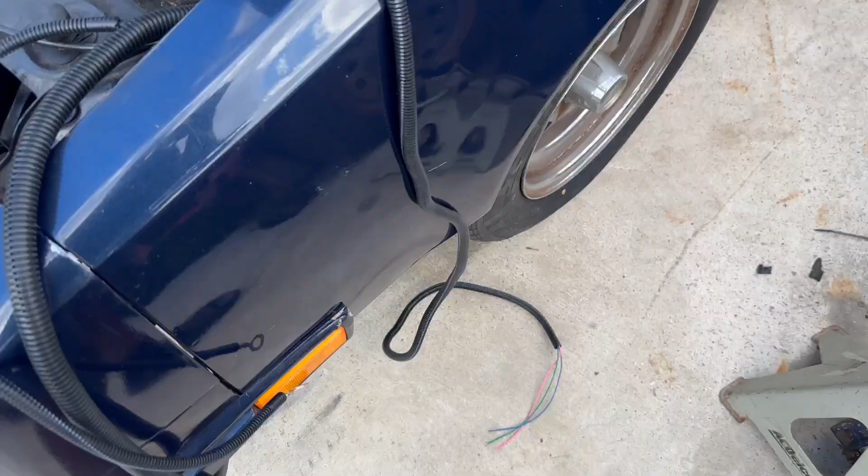So far I mounted my fuse block. I'm gonna show y'all where I mounted it at. Like I said, I mounted it right here, and my air filter still kind of fits right there. Basically, what I'm gonna do is run it up under there with the headlight loom, and it came with some of these, so I used these to secure it.

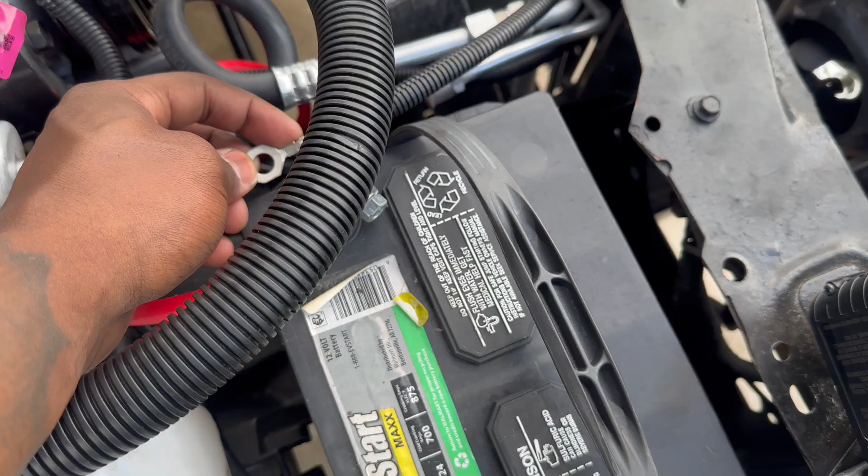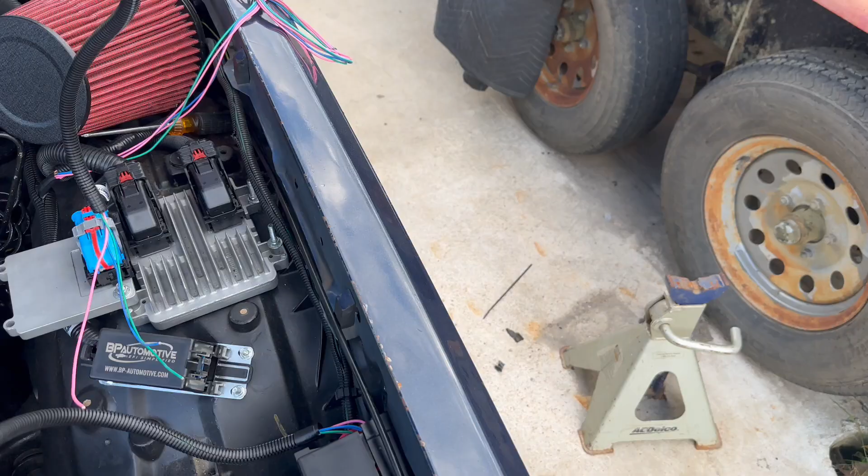I'll drill some holes. I have to pull the radiator back out and basically just run it back. I got it right here, and it's supposed to connect to the battery post, directly to the battery post. So that's what I'm gonna do. And once I figure out these, I have to connect these wires. I'll set something up to show y'all how I'm gonna run these wires, and I gotta trim them down. Then we can go and cut the shroud and put the fans on.

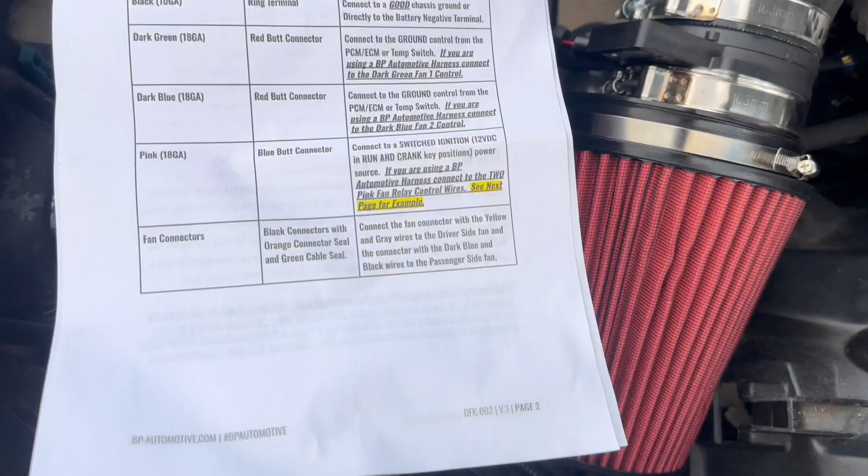All right YouTube, so this is what we got. Y'all see I trimmed some of the wires. So you see it say the red wire connects directly to the battery post. Black wire, that's the ground. So that will be basically right here.

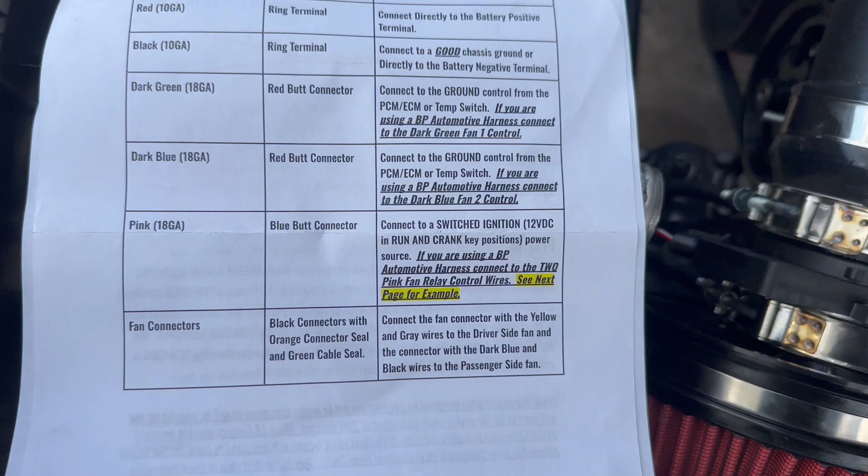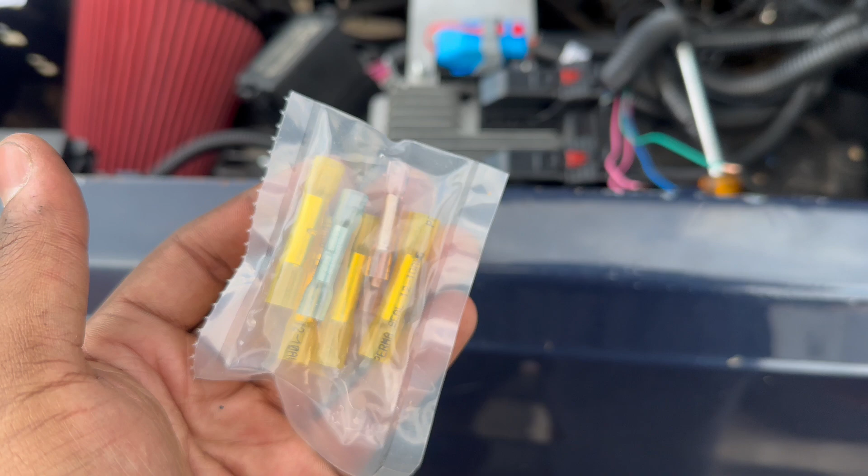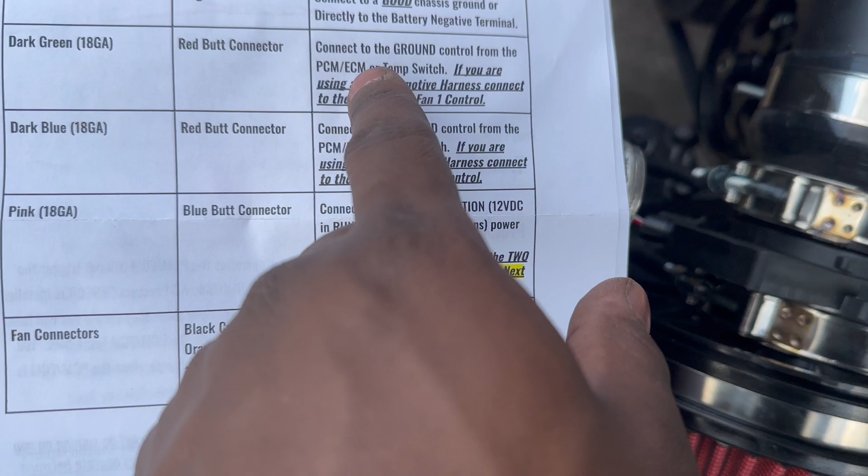I just connect that to anywhere, it says negative battery or chassis ground. All right, the dark green, it says use red butt connector. So I'm up in here, and that's my red butt connector. So I got to get that out, and it says, where is it? Oh yeah, there you go.

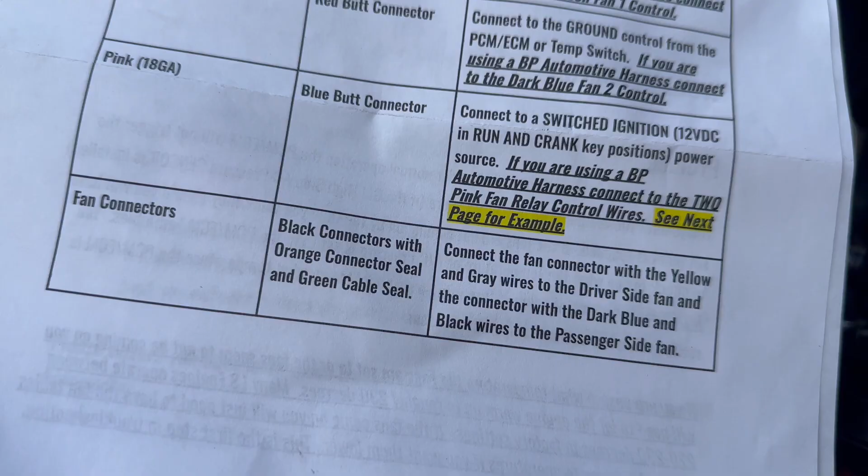It says connect the ground control from the PCM ECM/temperature switch if you're using a BP Automotive to dark green fan 1 control. So I basically connect this green coming off my main harness to this green coming off my fan harness. I'll connect those two.

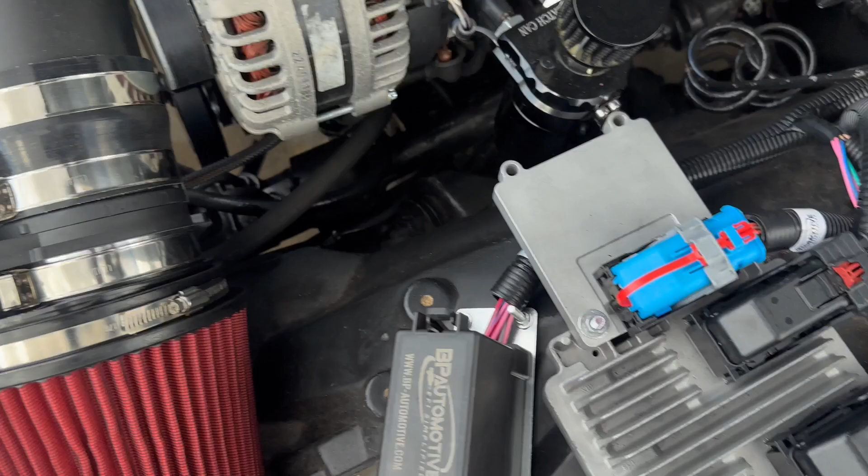Okay, the dark blue, basically the same thing, use a red butt connector. Hold on, yeah, where I was. Red butt connector, basically we're gonna do the same thing. So the dark blue off my fan harness to the dark blue off my main harness for the car.

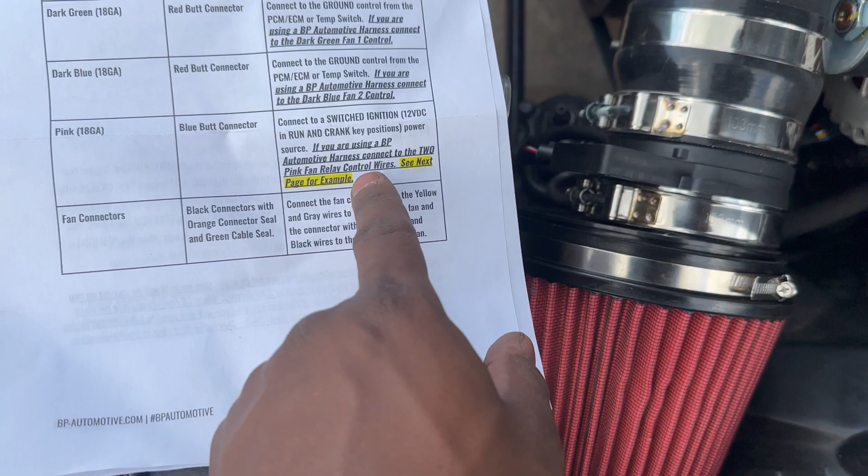Pink, all right, this one gets a little tricky. Connect to a switched ignition, run and crank key position power. If you're using a BP Automotive harness, connect the two to that. Basically, what I'm gonna do is take my pink wire coming off my fan harness and connect it to these two pinks coming off my BP Automotive harness for the engine, because these are key ignition on.

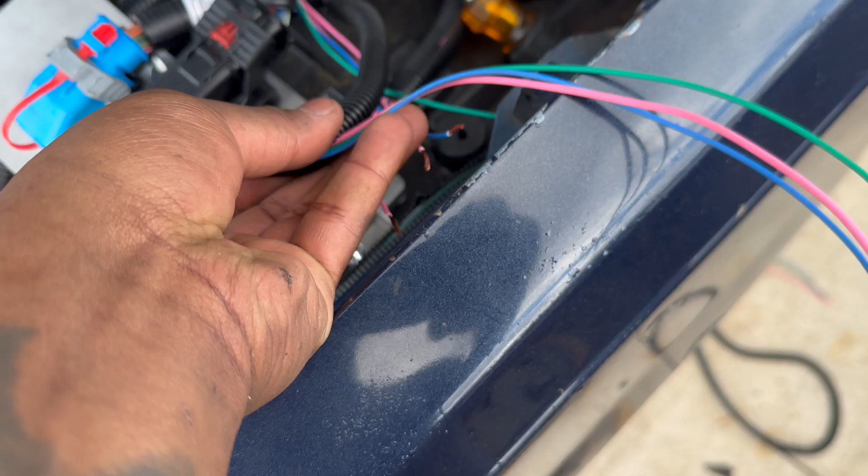So basically what I have to do is, it's telling me to use the blue butt connector, so y'all get the picture. Then the fan connectors, that's these right here, and I'll just run them to the fan. So I'm finna connect these wires and then loom it back up. See, I cut my loom just enough to cover those wires up, and I'll cut y'all back on. All right y'all, so move the screwdriver out the way.

So you see what we got. We got green to green, we got blue to blue, and we got 1 pink to 2 pinks. So all I gotta do is put this in this loom now. But let me heat shrink this pink. Y'all see I heat shrink those butt connectors, so let me heat shrink this pink.

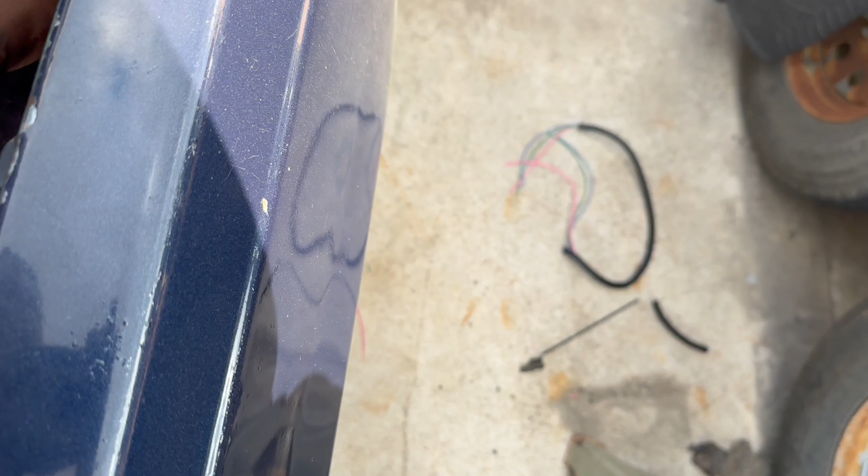All right YouTube, so that's what I got. Y'all see I got the fans. It's coming off the relay box, and see how I got it loomed up. This is it right here, but see, I got it, you can't really tell. And I still got enough room because the windshield wiper fluid reservoir still sits kind of high, and I can always put some spacers on it to kind of raise it up. But that's how it looks.

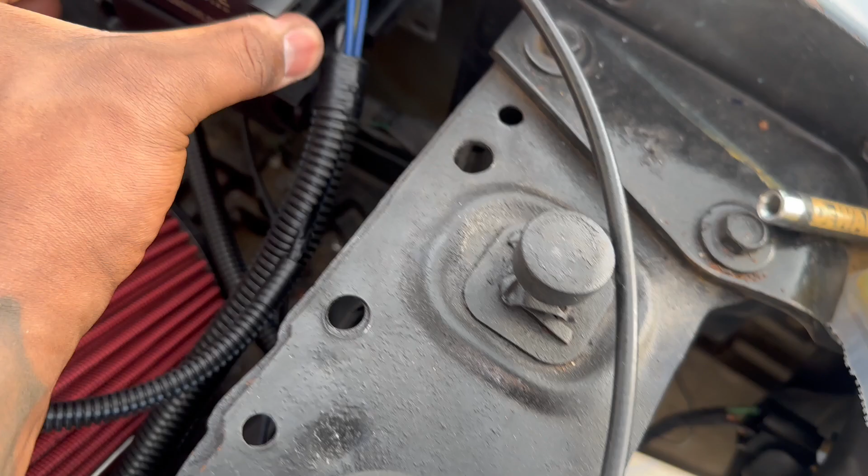Y'all see it? Let me open this up. And this relay from BP, this relay is basically a high speed and a low speed, that's why it's two, it's for 2 fans. Y'all see I got 2 relays and fuses in there.

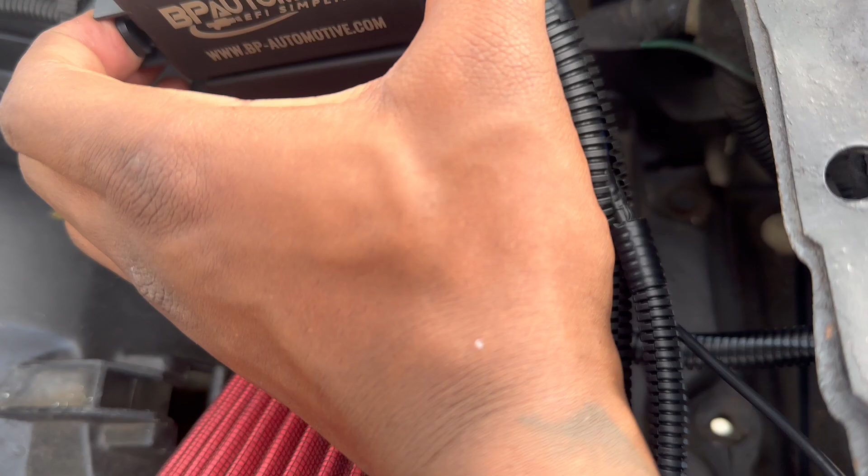So it's basically for the low speed. Basically how the low speed works, when the fans come on, well when the computer signals the fans to come on, they basically don't just click on in high speed, they'll start in low speed and then jump to high speed.

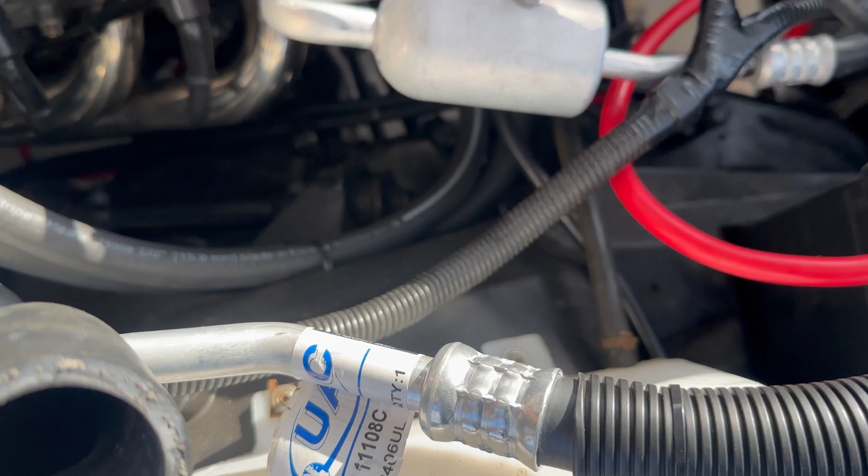And on top of that, this works with my AC too, because as y'all know BP Automotive, I think I showed y'all, this is my AC pressure switch thing. So basically I gotta run this, I gotta get my, what that is, the liquid line. I need to get my liquid line made, and basically it'll have a pressure switch like this in it, and I just connect this wire to it.

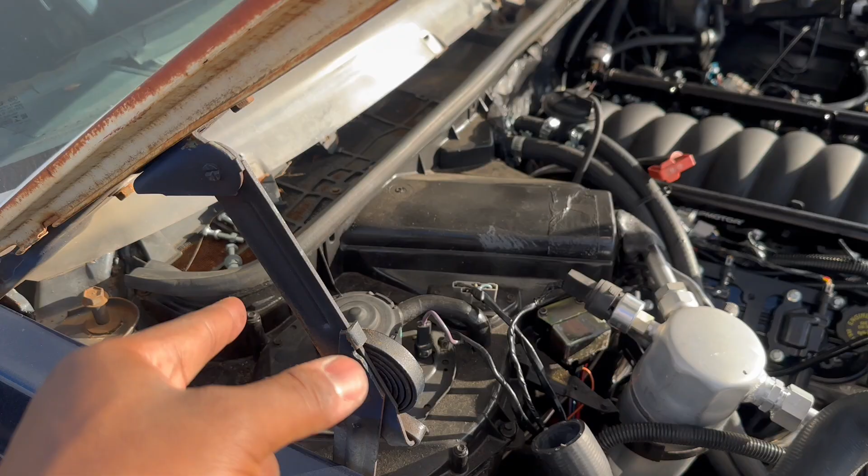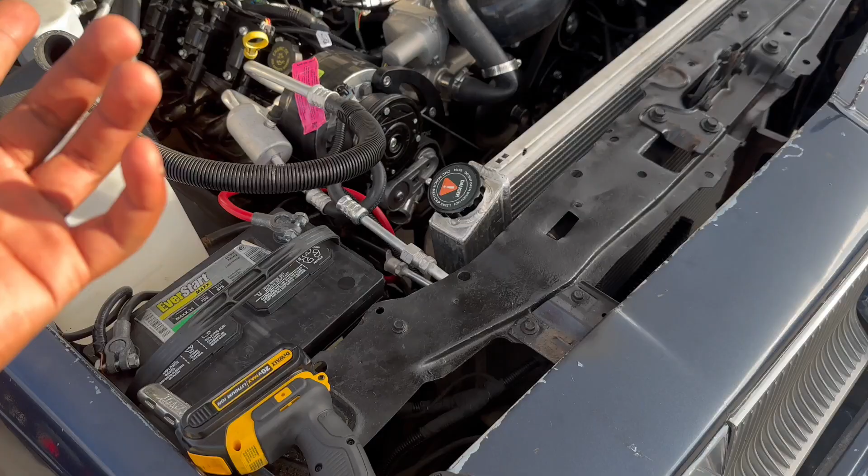When I click my AC on, it'll kick the fans on too. They got all that integrated in the harness so I don't have to worry about it. The only thing I need is a high pressure liquid line from here to here, which I found a website where you can make it, but I need to get the right hose sizes and fittings, I think it's an 8. So I'm working on that too.

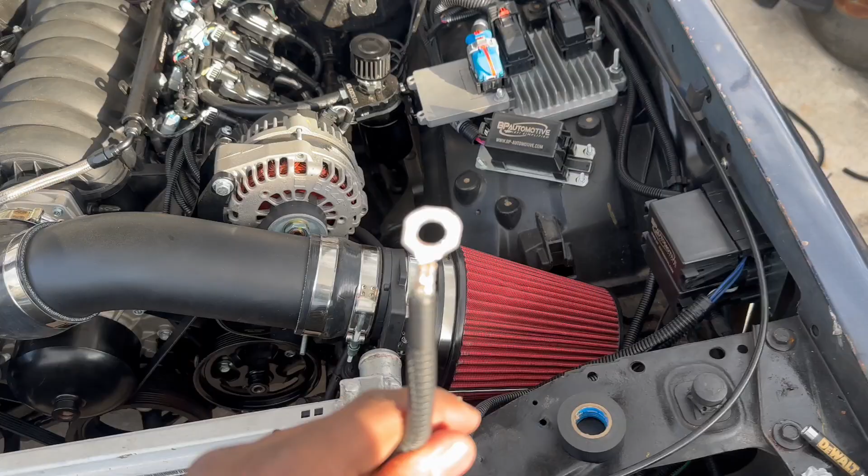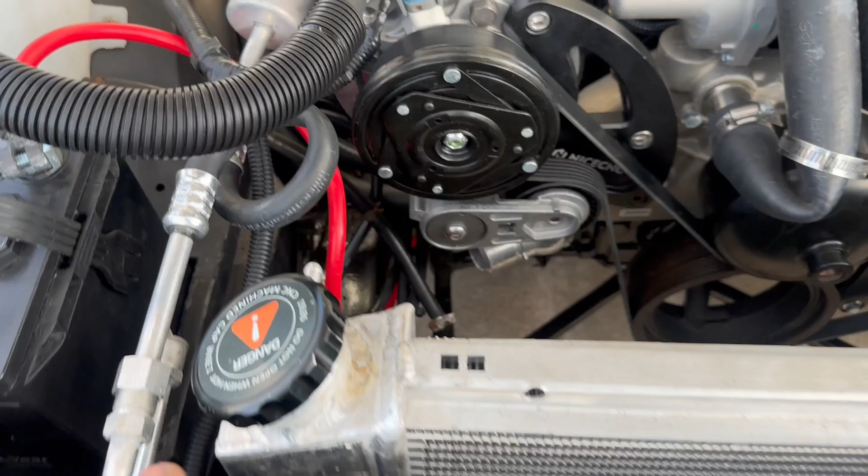So yeah, I showed you that. Let me do my ground next. This connects to a chassis. I got a ground for my motor running from this part of the frame to the motor, same thing on the passenger side, and a ground from head to head, then from the head to the firewall. I'm gonna remove that bolt and put this under it, and that'll be my ground since it fits right there, so I don't have to drill more holes.

All right, I got that ground connected to that frame right there. I'll spray some black paint over it again so you can't really see it, like I did with that one.

We can't do nothing with these yet, because these are for the fans, and there's a lot of it, so I don't know how I'm gonna wrap it up. Probably just ball it up right there.

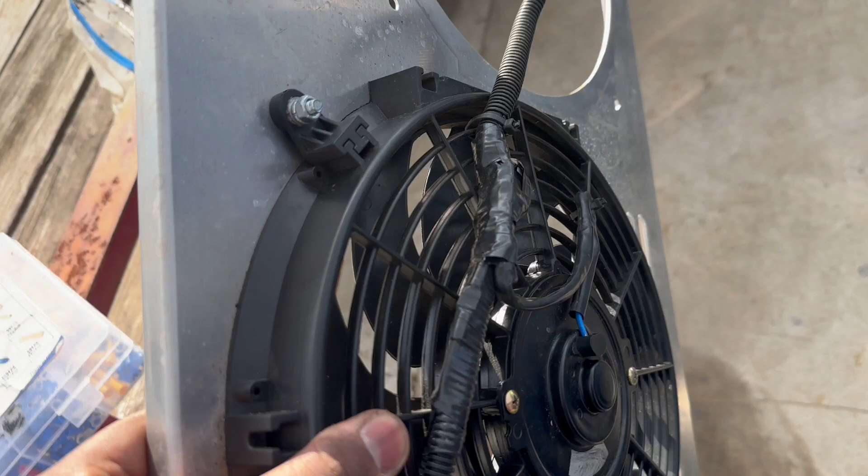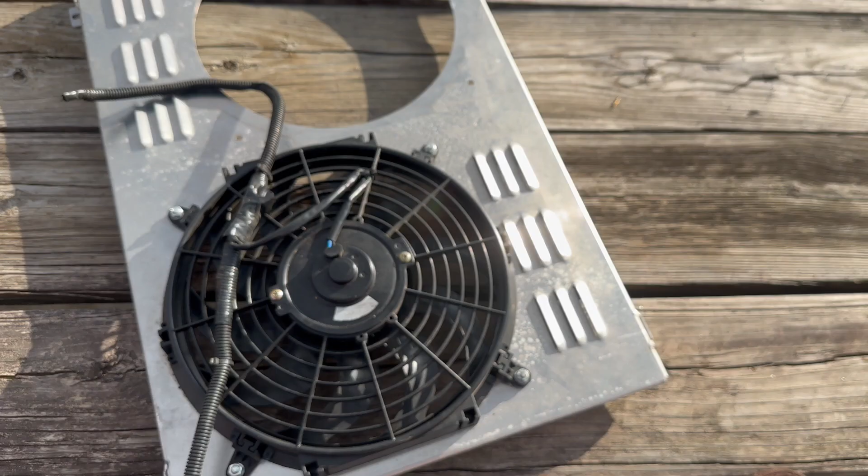Next we're gonna cut this fan shroud. I'm missing one fan because I gave one away since I didn't need it, but we're gonna get the other Spal fans, put them on here, size it up, fit it, and trace out the fans to see how far we have to cut. I don't think we have to cut much, probably about that much, but we'll get that and see.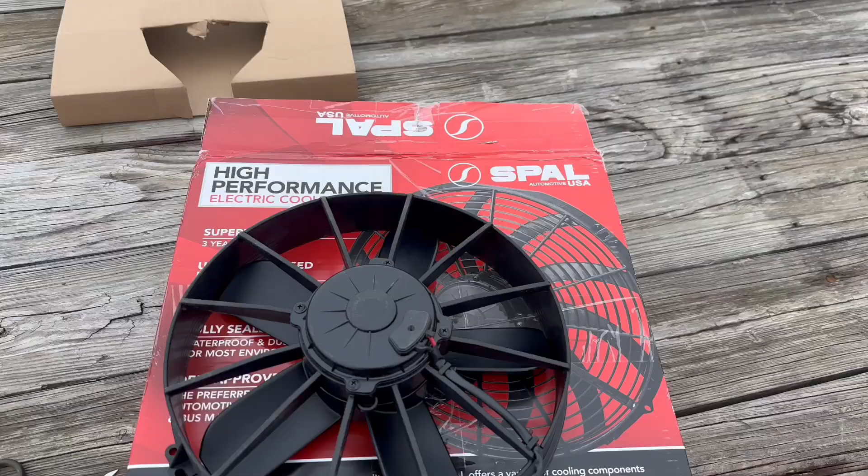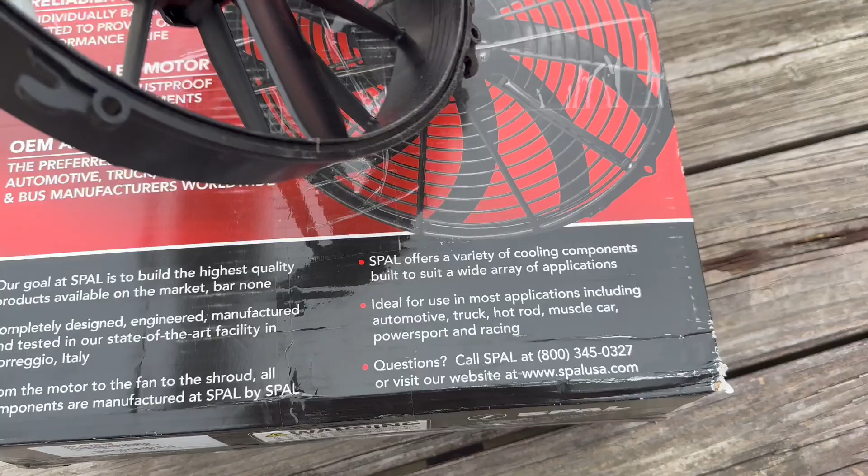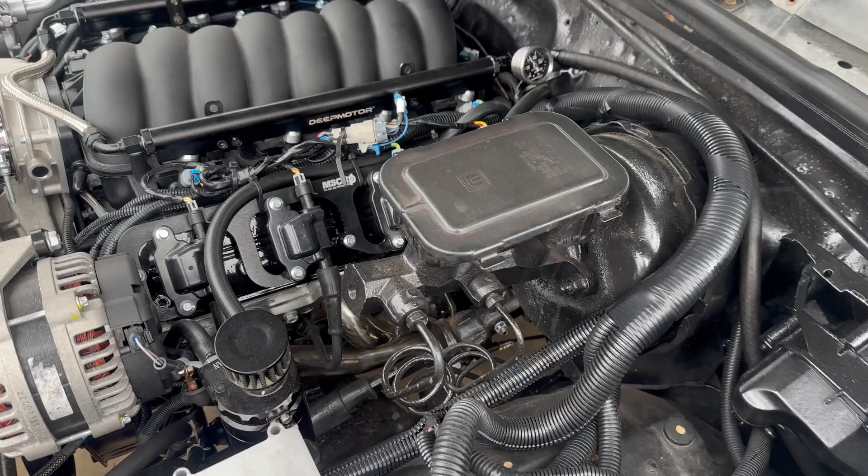All right, this is the fan. As you can see, it's pretty hefty and heavy as hell. This is the Spal fan I went with. These ran me, I got them off Amazon, I think it was like $118 a piece, I got two of them. The only reason I went with fans that were fairly expensive is because I don't want any problems with my car overheating. We put a lot of money into these cars, so I'm not trying to go the cheap route on certain stuff.

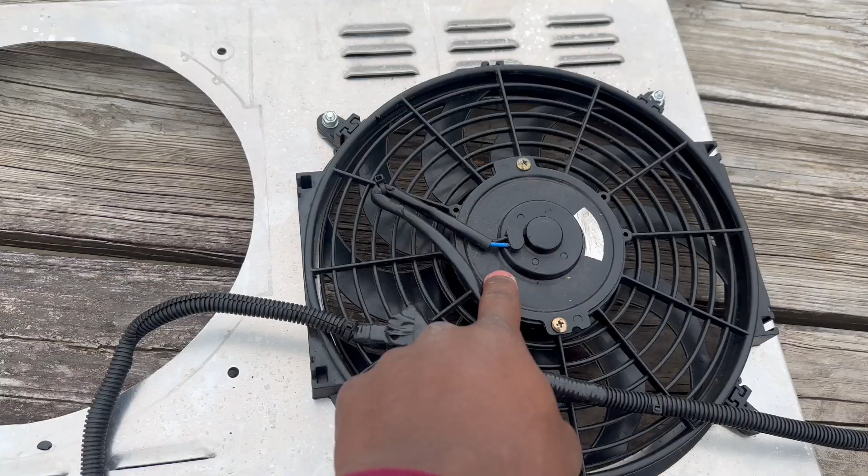Another reason I did it, I got my radiator, it's an eBay radiator, well I guess you can call it eBay, I got it from Alloy Works, and it came with this shroud with two fans. But like I said, I took one fan off and gave it to somebody because I wasn't using it for my new setup. So I got the big Spal fans so it can pull through this radiator.

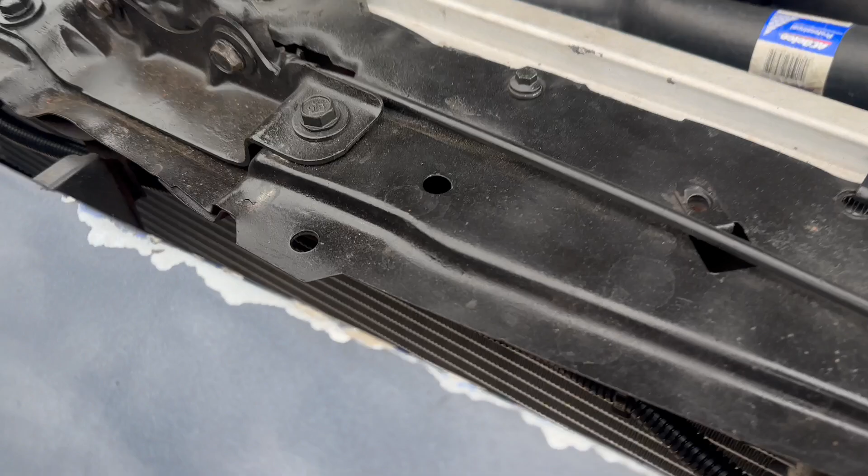I got my condenser for my AC, and on top of that I got a transmission cooler that came with my transmission rebuild. I was hoping those fans would pull through. I thought if I get some big powerful fans, they'll pull through all three.

Especially for this transmission cooler, the way I got it set up, I got it ran to the external cooler itself, and ran to the cooler on the radiator, so I have double cooling. I found a setup on Google for how to run it, so it goes through the radiator, then cycles through the front cooler, then comes back and goes into the transmission. Or it could be backwards, but it's getting double cooled.

Another thing I want to do is set up a temperature gauge, not a switch, that way I can run an inline gauge to check my transmission temperature.

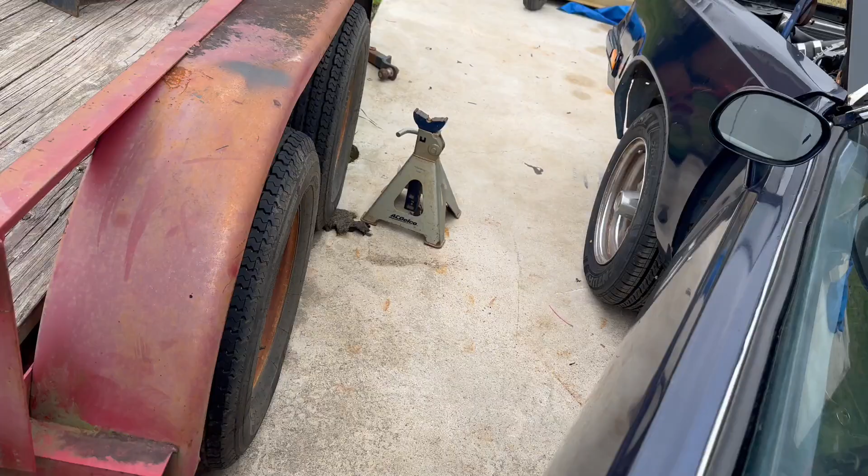Since I got the Dakota Digital setup, y'all know I've had it when I had the small block in here. I want to see if I can integrate the temperature into it, pop it up on one of these. I do have everything connected to a BIM module, so I don't have manual gauges connected to my motor. I'm using regular LS sensors for temperature, oil pressure, all the sensors that come on the LS motor, run through the computer, and I'm pulling that data from the BIM module.

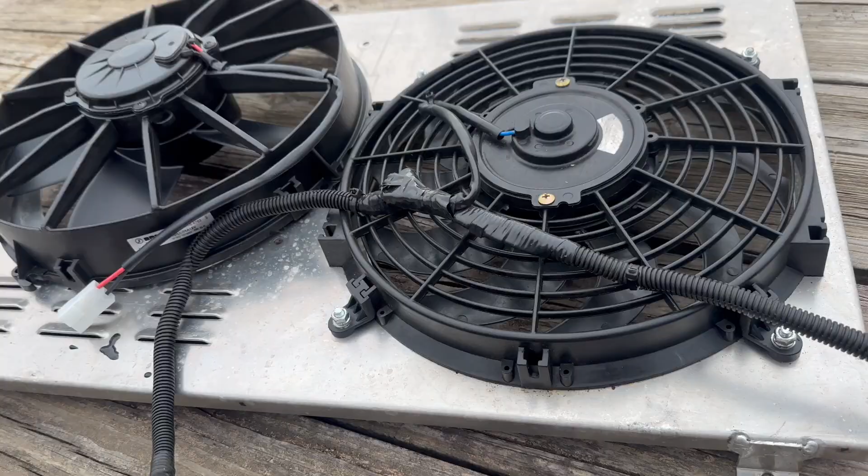So like I said, this is the fan y'all. I'm gonna put it next to here so y'all can see the difference. Look at the difference, a Spal fan versus the eBay fan that came with the radiator. Look at how big it is compared to that. I'm knowing that fan is gonna pull way more air than this one. I don't know how many CFMs it is, but I'm quite sure it's more than that little one.

This didn't come with no paperwork. It might be in this box, I don't know, I have to check and see. But just look at that size difference and think about it. We're finna put 2 of them on there.

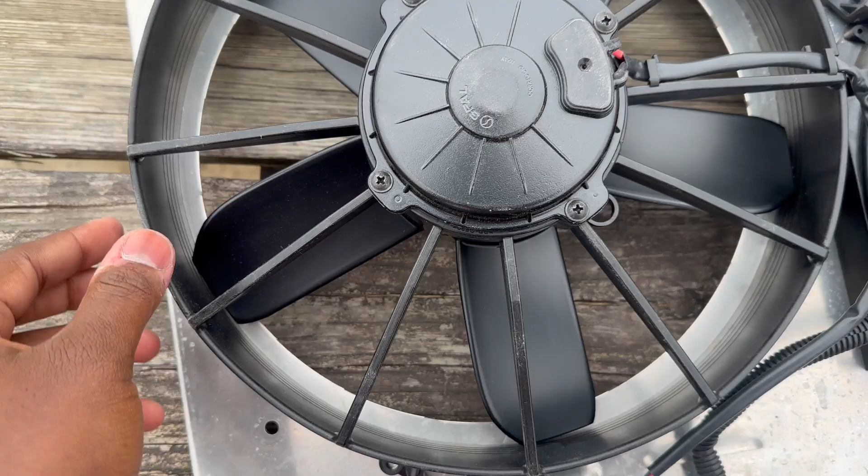So y'all see, I think I probably don't even have to cut. What y'all think? Or y'all think I should cut it a little bit? I did go buy a grinding wheel for an angle grinder, so we might cut it a little bit. But you see where the holes are lined up on it.

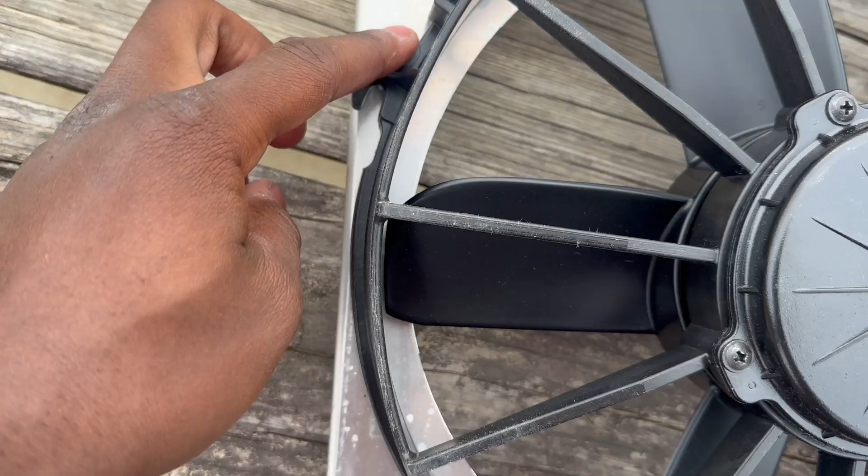Right there, so we're finna get, I'm probably gonna trim it. I really don't know if I should trim it. I might trim it just a little bit, but if I do, I'll let y'all know and we'll get back from there. Well, I tell you what, I probably won't trim it, honestly. Once I put it on the car and I'm having problems with it, then I'll trim it. So that's what we're finna do.

We're finna go ahead and drill some holes into this shroud right there and put it on, and I'll cut y'all back on.

All right YouTube, we got both of the fans on, and as y'all see, I didn't trim neither one of them. This one is kind of farther, y'all see it, but if I feel like me not trimming that would affect the performance of the fans and the cooling of the engine, then I'll pull the fans back off and kind of trim it.

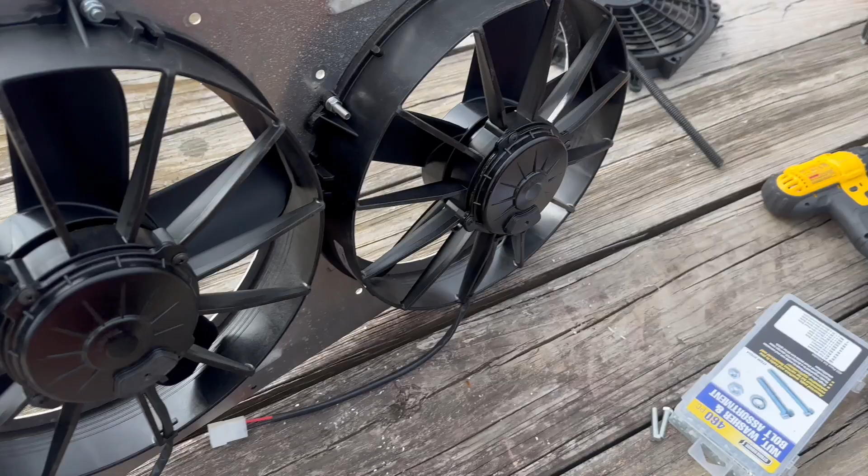But y'all see it, and my God bro, I swear this thing has to weigh about 5 pounds. These fans are huge, I swear they are huge. I don't think the video is doing it no justice.

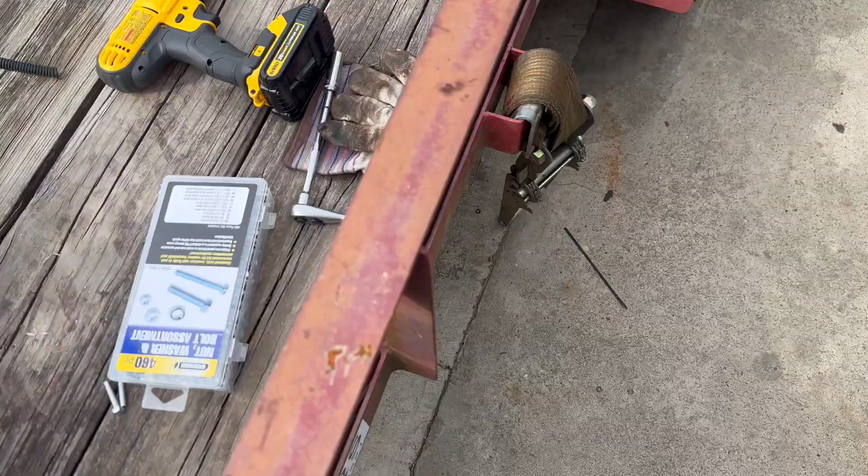I probably, like I said, these fans are probably overkill for my setup, but I'd rather be safe than sorry, because especially in Louisiana in the summertime it gets hot down here, and I'm in stop and go traffic. So I just want to make sure I have the adequate amount of cooling for my setup. I put too much money in here to let it overheat, you know. And like I say, then I'm gonna be running my AC and that trans cooler too, so I don't see why those fans couldn't cool this engine.

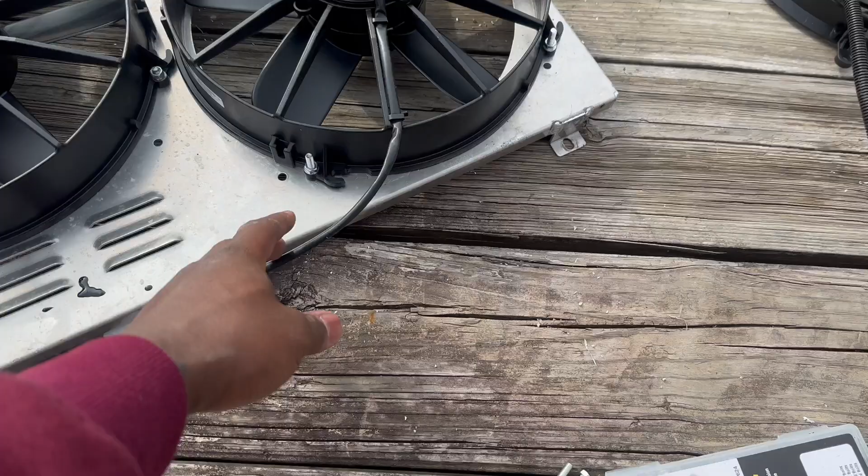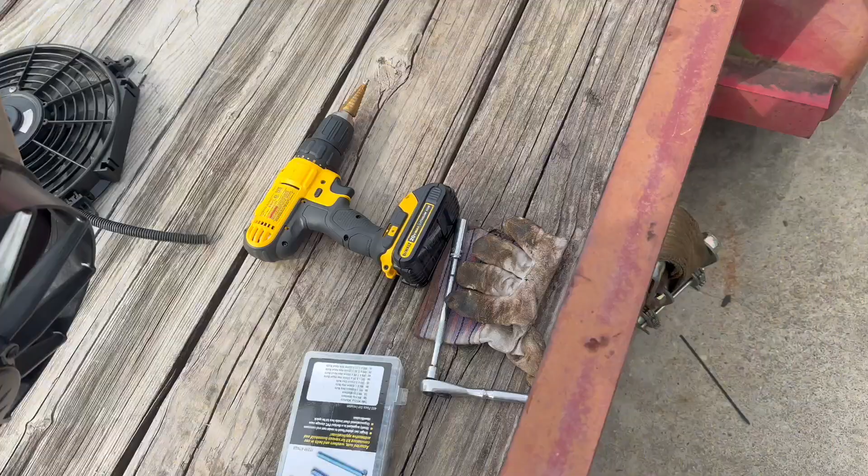And that shroud is not a deep shroud, so these fans will really be sitting on the radiator, they'll really be sitting on the radiator. Y'all excuse my hands, I know they ashy, but I'm messing up stuff already. Let me see if I can get it sat down in here, and I'll cut y'all back on.

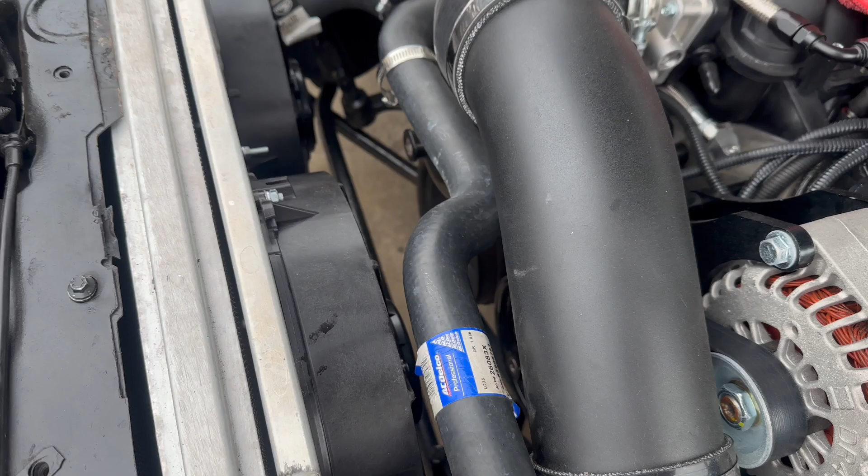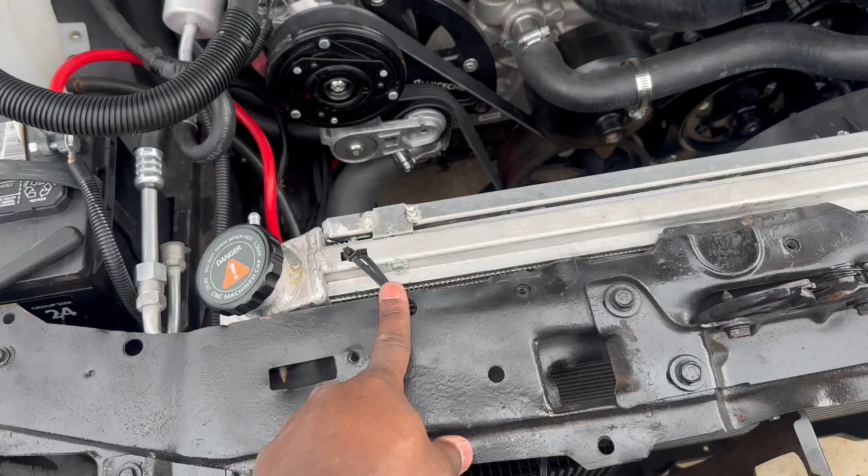All right YouTube, we got the radiator and the fans in, as y'all can see. Look at that clearance, how close, I mean it's not close, still got a lot of room. But y'all see, I got my upper hose on and I have my lower hose on, and I just got these zip ties right here to hold it. I can get a shroud, one of those metal or plastic shrouds, and that'll cover this up. Y'all see it, I think it looks nice.

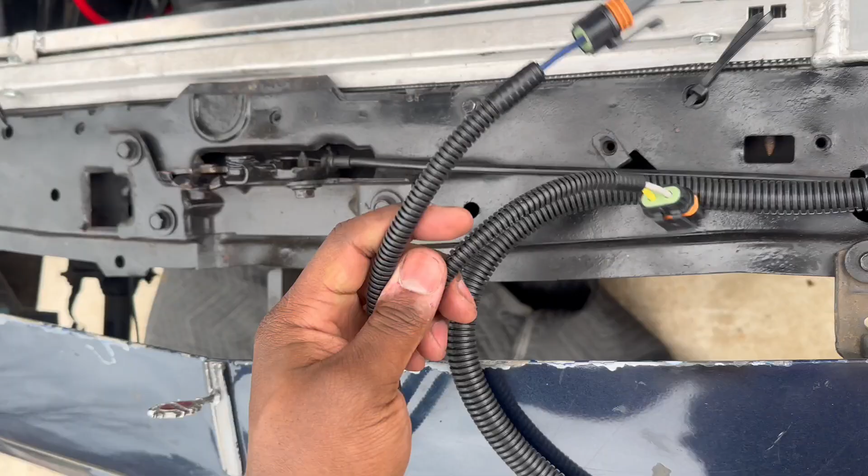All right, so the next order of business, or business of order, however you want to put it, is to run the relays to the fans. And as y'all see, they came with that right there. But let me get my, let me see, hold on.

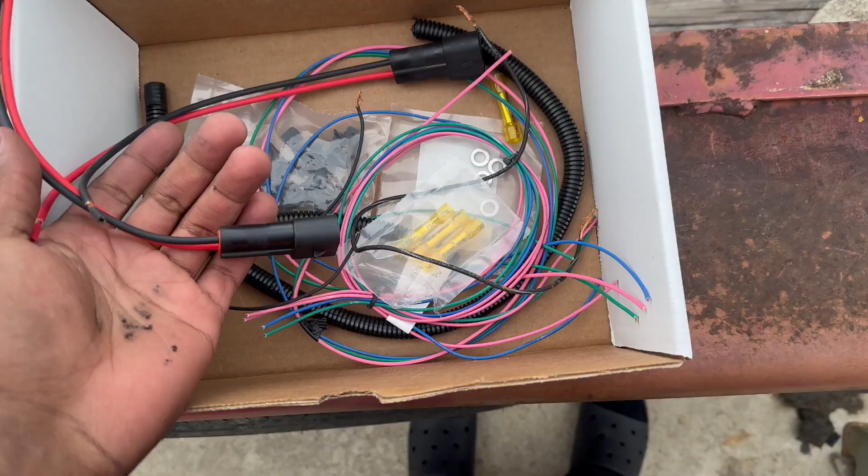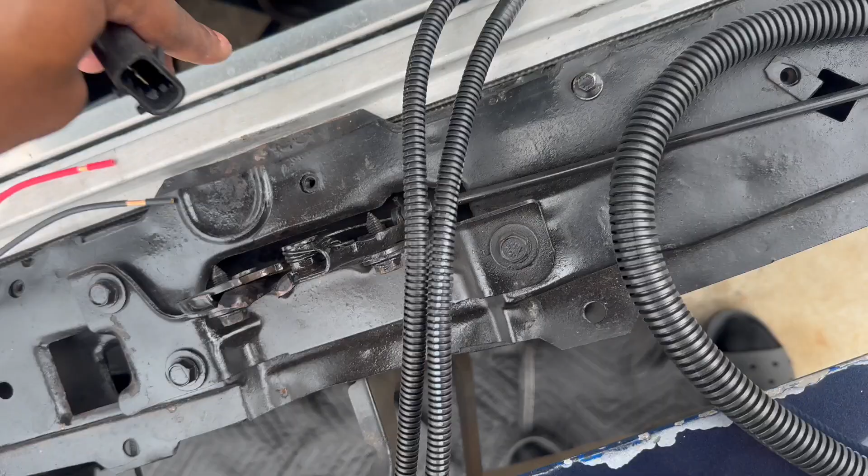Have to get the box that the relay came in. All right, here we go. Yeah, so this is what came with the relay. So I think these are gonna go on the fan side, because these plug into here.

So what we're gonna do, we're gonna cut this connector off and splice these on, and we're gonna do that on both, that way we can plug these in. All right, YouTube, I got the fans connected, as y'all can see.

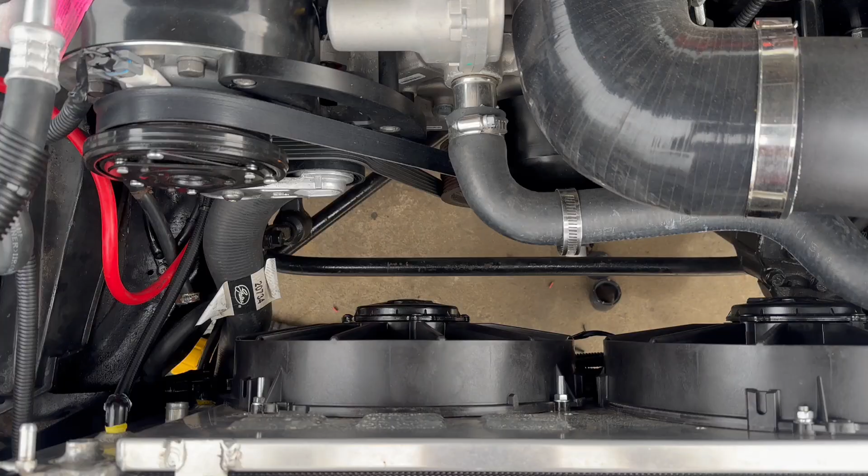Let me see if I can zoom out. I just zip tied the extra wires out the way. It looks good, you can see from the top, can't really see the wires down there. I let the camera focus. You can't really see no wires down there, so I think I did pretty good.

Now what we're really fixing to do, and I don't know how well this gonna go, but we're fixing to fill this radiator up. When I read, when you're filling up an LS motor, I don't know how true it is, but I'm gonna try it. Fill it up from the top hose first, put the hose back on. They say you want to fill it up until coolant starts coming out your bypass thing right there. So that's what I'm gonna do. Fill it up until coolant starts pouring out of there, and then put this back on, and then you'll fill up the radiator right here with the car running.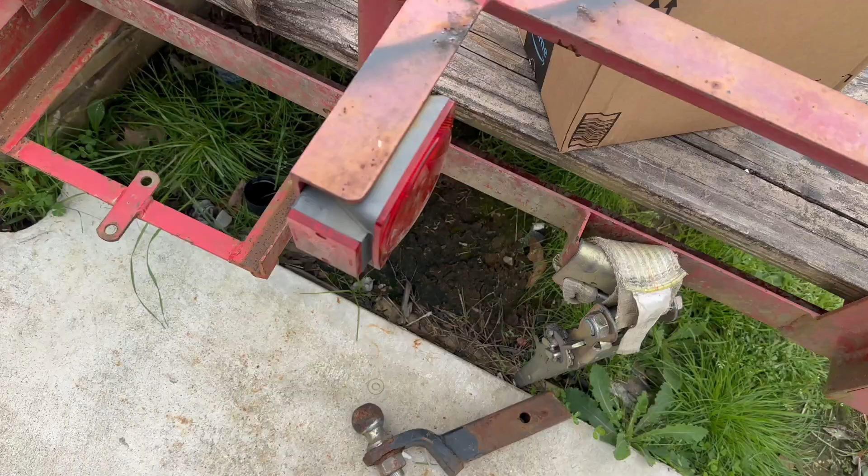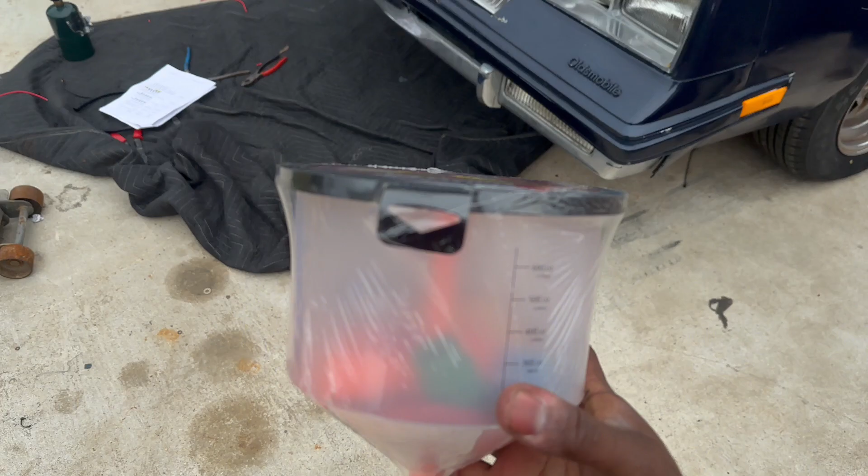And for that, I ordered something off Amazon, so let me show y'all what I ordered. I ordered this, so what this is basically to help me bleed the system. I guess I just put it in there and fill it, that way I don't have to have coolant spilling out.

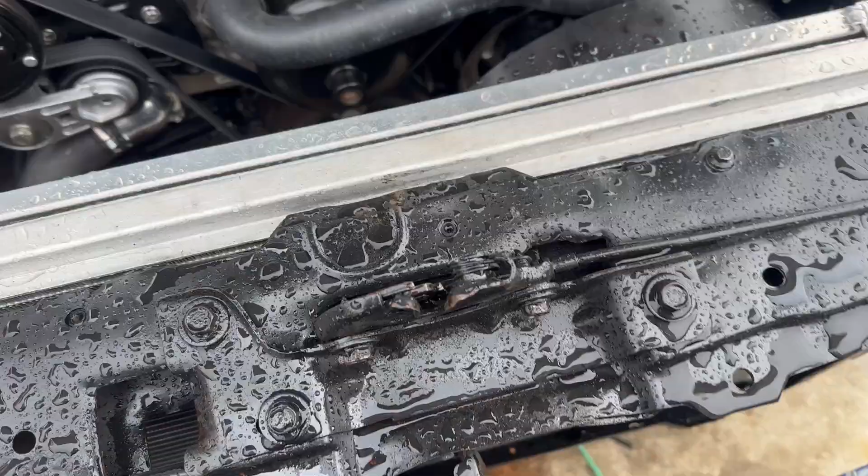YouTube, well we got some problems. All right, problem number one is, y'all see it, these crossover lines are leaking on both sides. I brought them off of eBay. All right, my second problem is, or maybe y'all can help me, the radiator's hot.

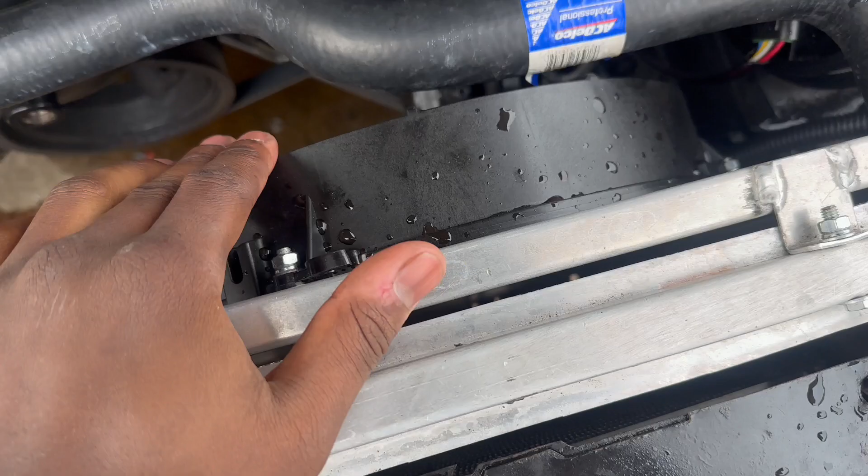The top radiator hose is hot, but this bottom one is still cold. The water pump is hot, but the bottom one's still cold. And I don't know, like maybe when the car did get up to a certain temperature, both fans kicked on. And I don't know if that was keeping the thermostat from opening. I don't know, but both fans did kick on, as y'all see. And I don't know if that would cause the thermostat not to open. Because I don't think nothing is clogged.

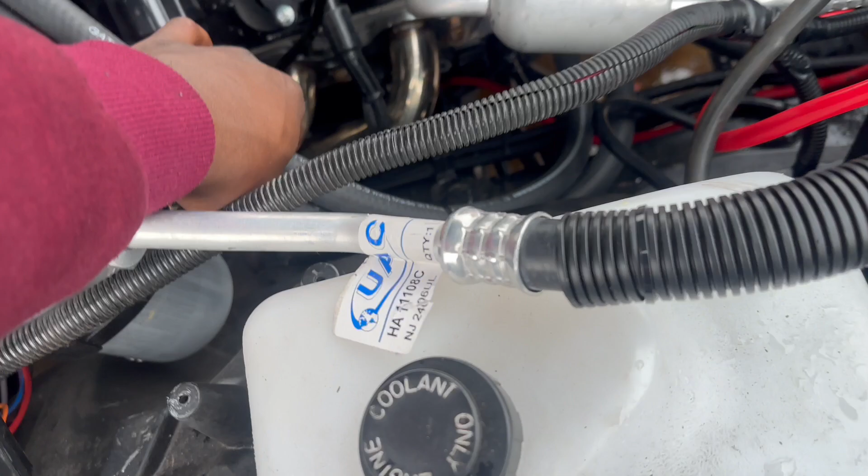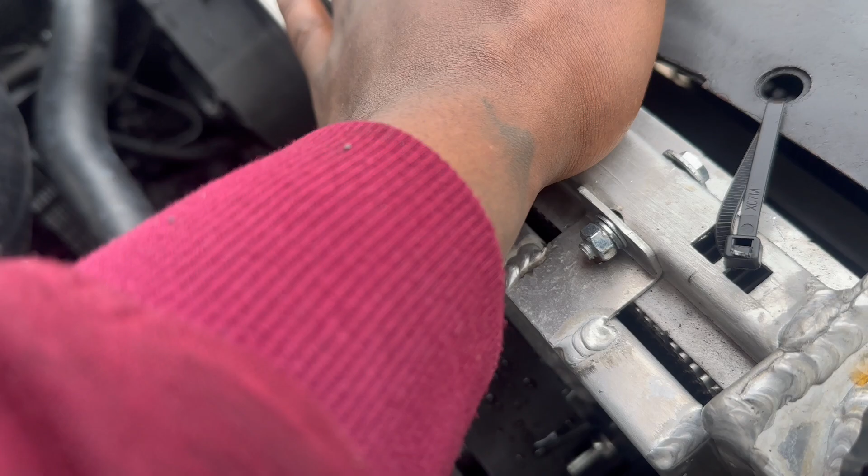Nothing can't be clogged, because I got these new hoses right here for the heater core. They new. Those hoses, the bottom hose for the bottom radiator hose is new, the top radiator hose is new. The radiator has been flushed multiple times before I put it back in here, which it was still basically new. And the water pump, it was working.

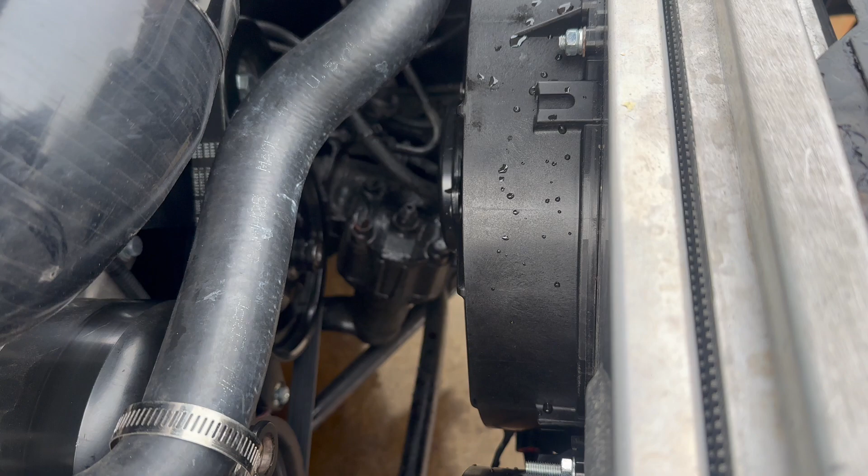Maybe the fans are keeping it from cutting on, and keeping the thermostat from opening up. And when I'm bleeding the system, maybe I need to take the fuses out the fan and let the car get up to temperature. That's what I'm thinking, so y'all get in the comments and let me know.

Oh, and I did, let me show y'all. I ended up draining my battery when I cut the car off because I didn't run a charge wire to the battery. I forgot about that, so I need to do that and charge my battery. And I guess we can figure out why that thermostat is not opening.

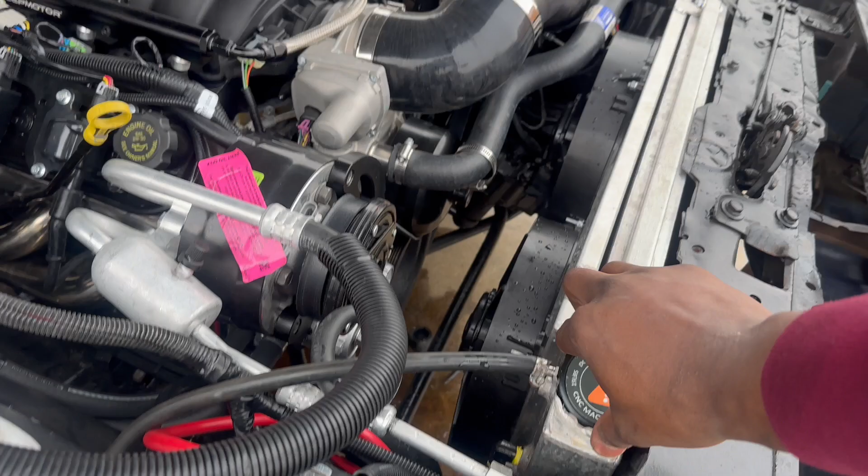Cause see, this is still full. I put the whatchamacallit in there, the little funnel, and it was burping itself, so I don't know, I'm confused. So y'all get in the comments and let me know if that's my reason, because the fans are kicking on. And when I say those fans are blowing, like they really, they're pulling. Like I put my hand in front of the grill and I can feel the air pulling.

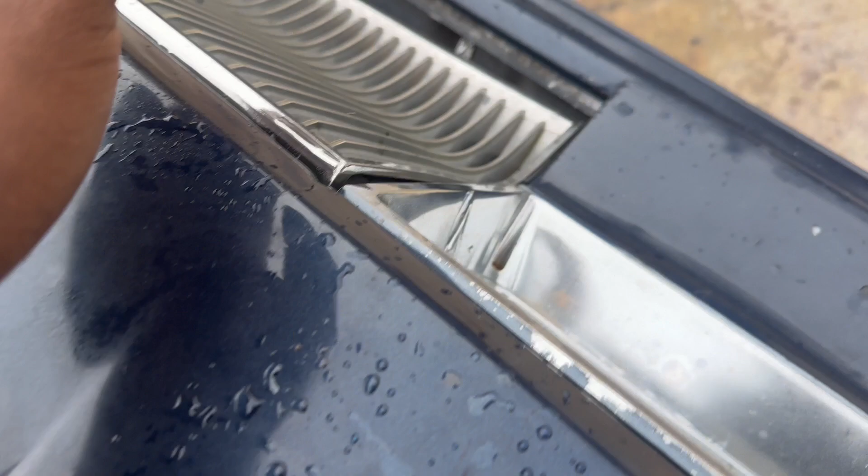Next video, I'm gonna get a piece of paper and show y'all, put a piece of paper in front of the grill and show y'all. But like I said, y'all get in the comments and let me know if that's my reason why my bottom hose is not hot like the top one, because of the fans. They, I guess, working. So that'll be it for this video.